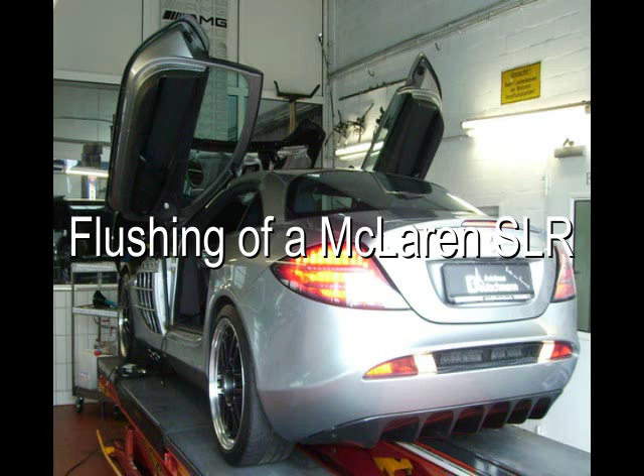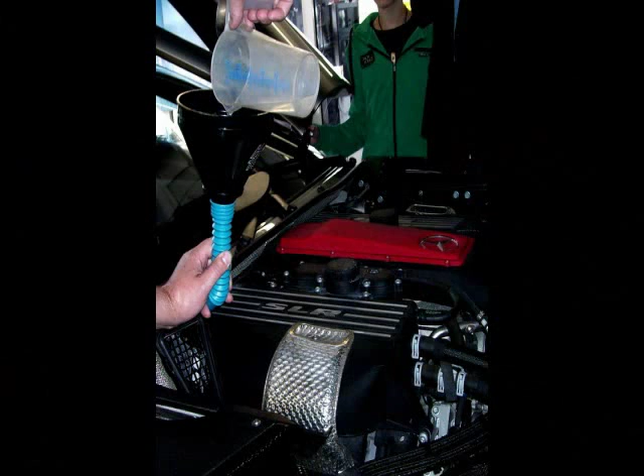Flushing of a McLaren SLR 722 edition. Pouring in the cleaner. If there is a dipstick, first check the oil level and the oil quality. Then pour 400 ml of the automatic gearbox cleaner into the dipstick opening and drive the car for 15 minutes. The automatic gearbox cleaner must only remain in the gearbox for maximum 90 minutes.

Connecting flushing system. Change position level horizontal, flow position level vertical. The flushing system is connected in the return or in the flow of the heat exchanger, where the simplest connection is possible. Dismantle the heat exchanger pipes and fit suitable adapters to them.

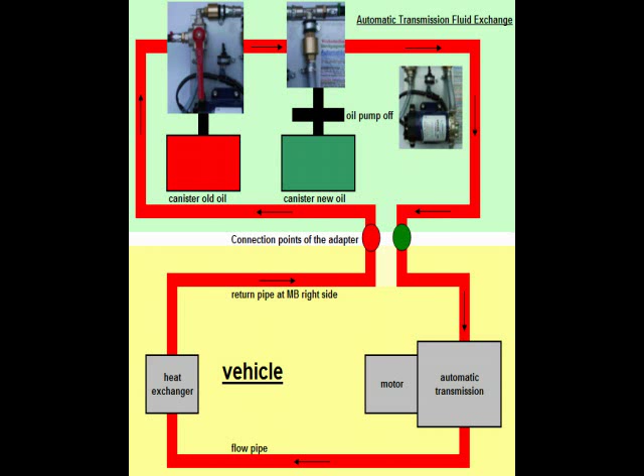Flow pipe. Connect the pipe which comes from the gearbox and delivers the oil in the direction of the heat exchanger to the left red marked hose of the automatic oil change system. Connect the right green marked hose of the automatic oil change system to the flow pipe which goes to the heat exchanger. If correctly connected, the oil flows in the through-flow position level vertical from left to the right through the automatic oil change system.

Pumping in the cleaner. If there is no dipstick opening for introducing the automatic gearbox cleaner, the cleaner must be pumped in as described below. Put the automatic oil change system to the through-flow position level vertical. Start the engine. Unscrew the lid of the old oil canister and hold it over the 2000 ml measuring beaker. Switch briefly to the change position level horizontal until 1.6 liters of the old oil is in the measuring beaker. Pour 400 milliliters of the old oil from the measuring beaker into the old oil canister. Screw the old oil lid back on tightly.

Switch the engine off. Fill the measuring beaker with 400 milliliters of automatic gearbox cleaner again up to the volume of 1.6 liters and pump it with the 12-volt pump. For this use the short adapter hose which enables the oil to be sucked directly out of the measuring beaker. Then either disconnect the adapter or bridge it with the bridge hose and drive the vehicle for 15 minutes, or run it on the lifting ramp with the vehicle in gear R for 5 minutes or gear D for 5 minutes. All drive wheels blocked, no acceleration, just idling. After that, drive through all gears in chassis dynamometer mode or ESP off. The drive wheels are to be free and unblocked during this procedure.

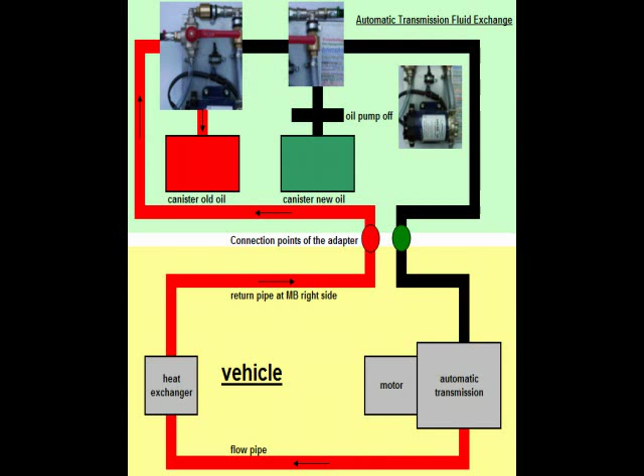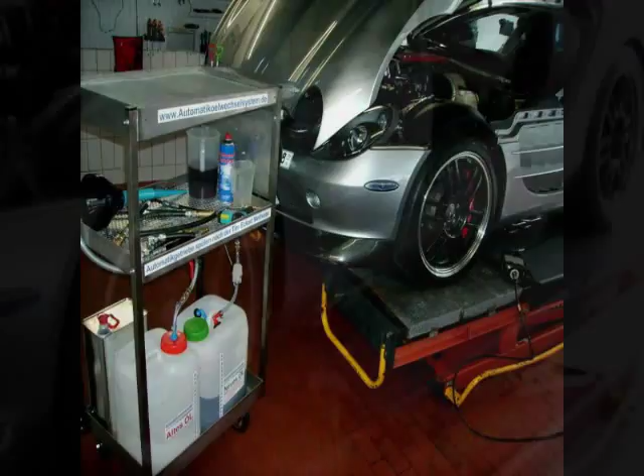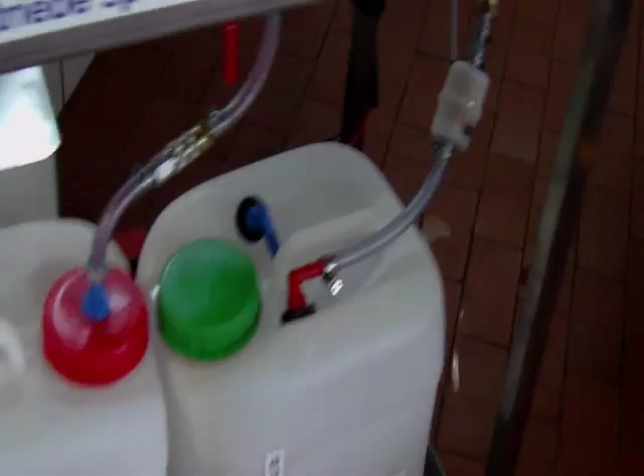The automatic gearbox will now be pumped empty until no more old oil comes out. After this, switch on the 12-volt pump. When connected to the return pipe, new oil is pumped in until the right hose and the pipe right up to the gearbox is filled with new oil. This is not necessary if the fitting is carried out directly at the gearbox and if there is still oil from the flushing process in the right hose.

When connected to the flow pipe, new oil is pumped in until the heat exchanger and the pipe to the gearbox is filled with new oil, 0.5 to 1 liter depending on the heat exchanger size.

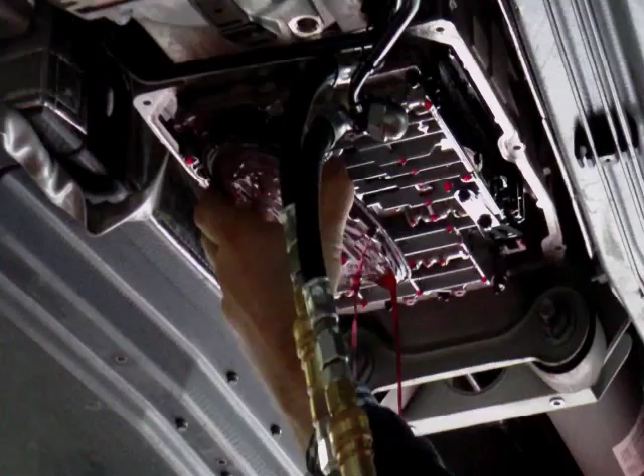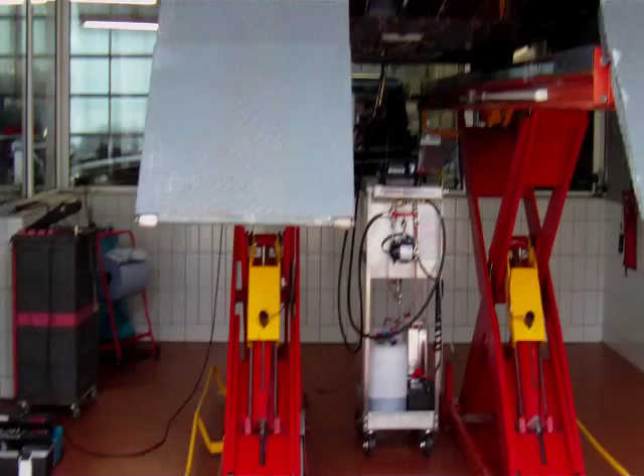The residual oil in the oil sump and oil filter is required in the old oil canister for measuring the entire quantity of old oil which comes out of the gearbox.

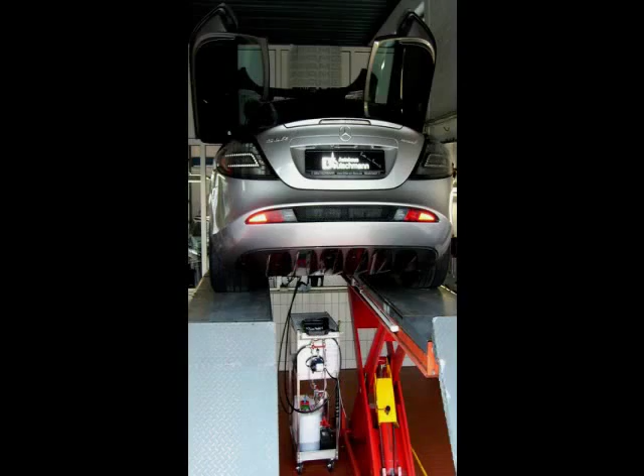If the converter has an oil drain screw, this should also be opened. Replace or update any missing magnets. Renew the oil filter if this can be dismantled or changed. Clean oil filter. Install the oil sump with a new gasket. Test the electrical connection for leaks and if possible pull out the connection plug.

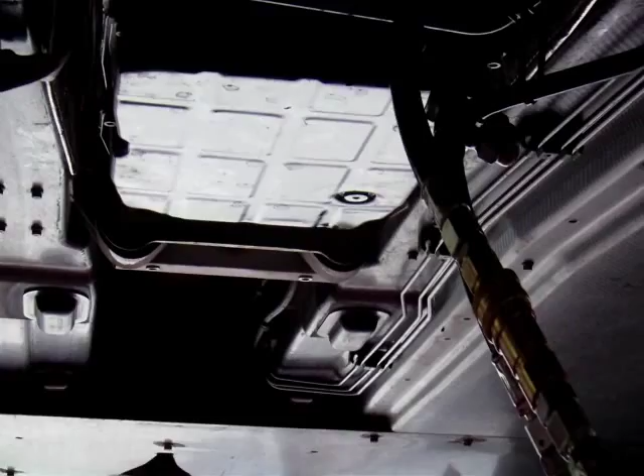Then switch on the 12-volt pump and fill the gearbox, depending on the gearbox size, with 3 to 4 liters of new oil. With low flushing, an additional 0.5 to 1 liter of new oil must be pumped in.

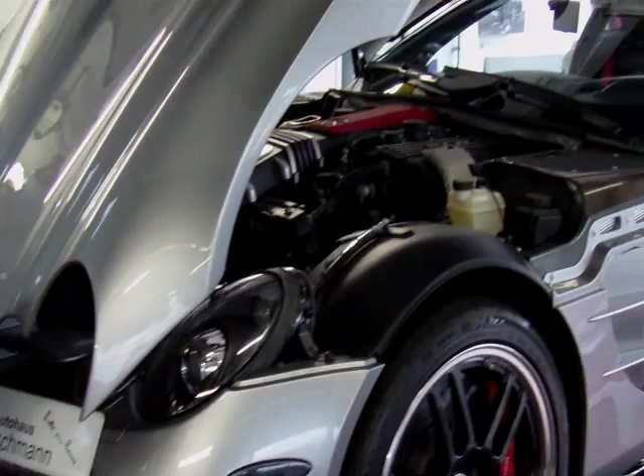Flushing. Start the engine. The 12-volt pump is still switched on. Later off. Engage gear R. Do not press the accelerator. All drive wheels to be blocked. After 50 seconds, engage gear D. Do not press the accelerator.

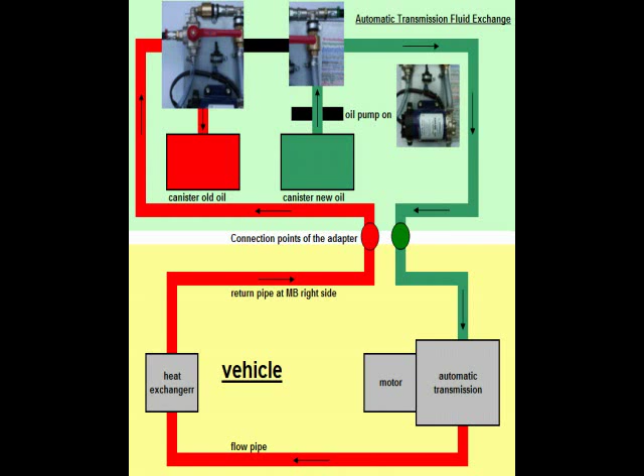If clean oil comes into the transport hose at the bottom by the three-way tap, then let circa 2 to 3 liters more run into the old oil canister, overflushing. After this, switch to the through flow position, lever vertical, and pump in the same quantity of new oil as is present in the old oil canister.

With gearboxes in which the cleaner was added through the dipstick opening, pump in 0.4 liter less new oil than is present in the old oil canister if the oil level at the beginning was correct.

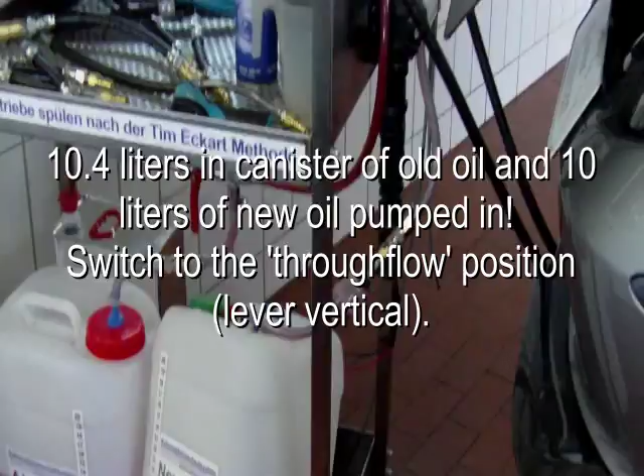Now release the blocking of the drive wheels and go through all the gears on the lifting ramp. Vehicle raised and wheels free, ASR off and roller test bench mode. By accelerating, for MB5 gear it is enough to insert gear 1 till 3, and for MB7 gear it's enough gear 1 till 4. Engage gear R shortly.

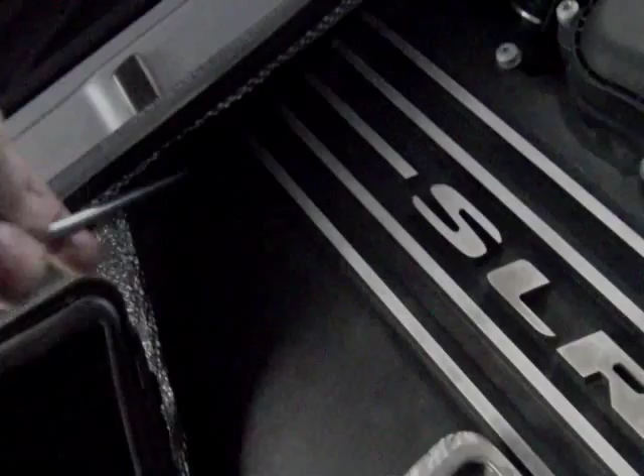Switch off the engine. If the gearbox temperature is too high for measuring the oil level, the shortfall can be made up by further pumping in new oil after the oil level check. An additional quantity of 93 milliliters of new oil per 10 liters of oil volume and per 10 degrees of higher temperature must be pumped in. Rule of thumb: 100 milliliters of oil per 10 degrees higher temperature.

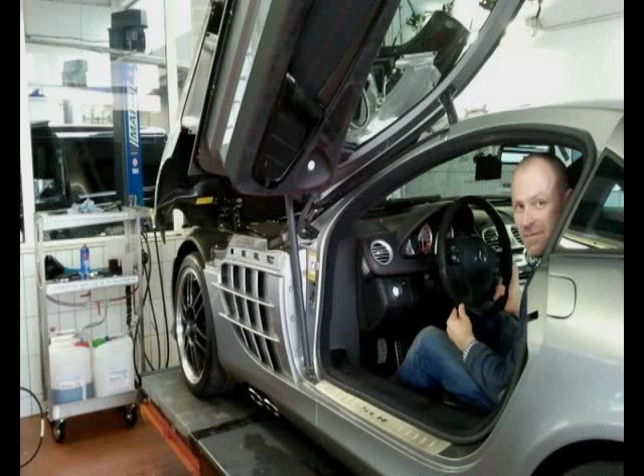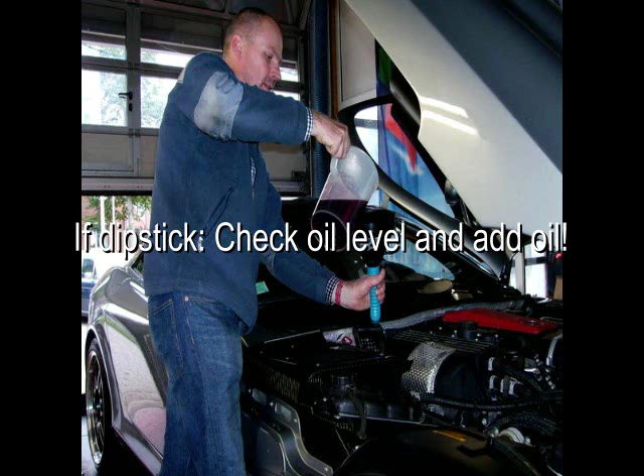Dismantle the adapters. Check everything for leaks. Empty the old oil canister. Test drive. If dipstick, check oil level and add oil. Ready to race.